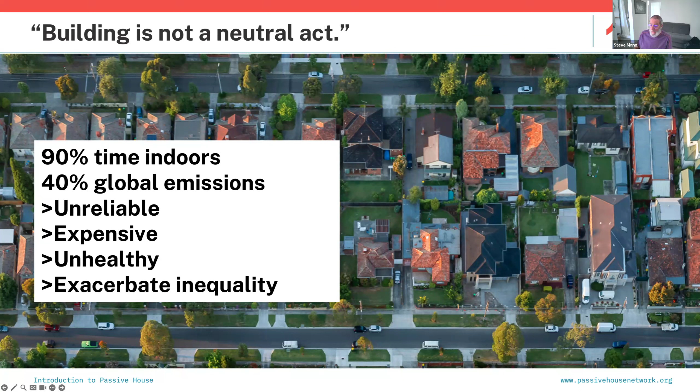So the people with the fewest resources generally get the short end of the stick. That's not a new idea or a new mission, it's just the way it is. In the passive house world, we have the opportunity to address that issue as well, and there are people doing that. I'll show you a few examples related to that, but we need more. We need a lot more.

In the world of climate change and everything that triggers, with fires, with floods, with extreme heat, like they had up in Portland a couple of years ago—I have a colleague that lives up there—with all of these types of things, we need to look out for the occupants. It all boils down to the occupants. We need to take care of the people.

There are basically, in the passive house world, two kinds of buildings that exist: those that are prepared for climate change as best as we can be prepared, and those that aren't. You can't possibly totally address climate change perfectly, that's just not going to happen, but you do the best you can to minimize your impact on climate change and to maximize the quality of life for the occupants.

That's what we're trying to achieve. So you either go down that path or you don't. And if you don't, then you're really not preparing yourself or the people that occupy the buildings you design and build for the future. We really need to be responsible about these kinds of things.

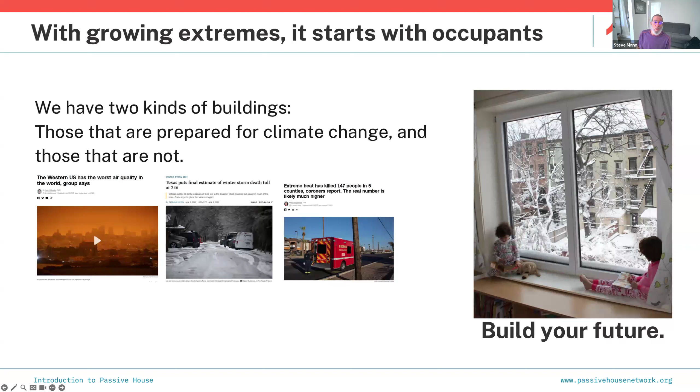So when we look at all these things from a passive house perspective, here's sort of a bullet list of things that we look for. It says here, efficiency underlies what we value most, but we don't start with efficiency—I'll talk about that a little bit more in a couple of slides. What we really focus on is comfort. That's probably the key number one issue, comfort for the occupants.

Zero emissions if possible—we want to minimize the carbon footprint of the buildings, both as they are built and as they're lived in. We want them to be as healthy as possible. We want them to be cost effective.

And there is a stereotype that passive house buildings cost more to build. For single family residences, yes, that's probably true. But for multifamily buildings, it's actually possible to build multifamily buildings that are passive house certified that cost no more, or perhaps even less, than a market rate multifamily building. So cost effective is a relative term, it kind of all depends. Other things we're looking for are resilience.

What that means is when we have climate related events, these buildings survive. Just to give you one example, if we have a power outage in the winter—and I know in California we have a mild climate zone, but it does get chilly in the Bay Area—if we have a power outage for a couple of days in a passive house, typically you won't see the temperatures drop significantly.

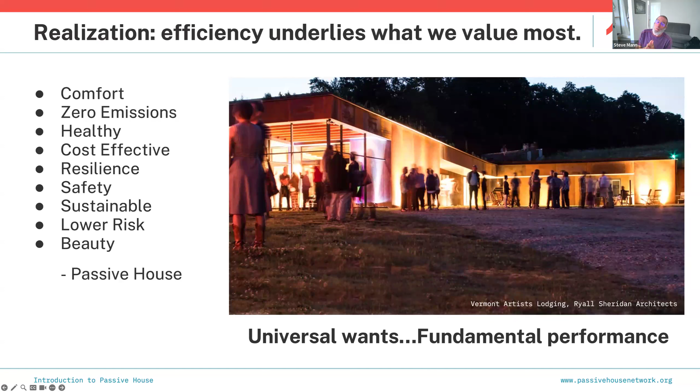Courtney asks: can ERV filters handle smoke season? I've heard they can—a separate filter box can be an option. The ERV filters can handle smoke season up to a point, but you can also add additional filtering in line with the ERV filter. I'll talk about ERVs for those who don't know what they are—you can filter the heck out of incoming air, put HEPA filters in line, put multiple filter boxes in line. There are different options for dealing with smoke events in a passive house, but generally they perform very well. Again, they don't perform perfectly, but they do better than most.

What we're looking at in the passive house is fundamentals. We don't look at aesthetics so much, we don't look at daylighting, although that's a factor. What we do look at first and foremost is the enclosure—we want to build a high quality enclosure that drives this whole process. If you focus on that using well-known building science and physics principles, and this is where it can get nerdy, all this other stuff I just talked about kind of falls out of that process naturally. It's not about mechanical systems.

That comes last, believe it or not. You don't solve a performance problem with hardware. You solve it with the building enclosure first and foremost. And if you take that approach, you pretty much empower everybody in the whole process to build a good building.

We think of this as a team sport, so people don't operate in a vacuum. Ideally, in a passive house project, for those of you who may have heard the term integrated design team, we try and do that, just like in other architectural or building projects. There's more of a focus on that in the passive house world. Doesn't always work perfectly, just like other types of projects.

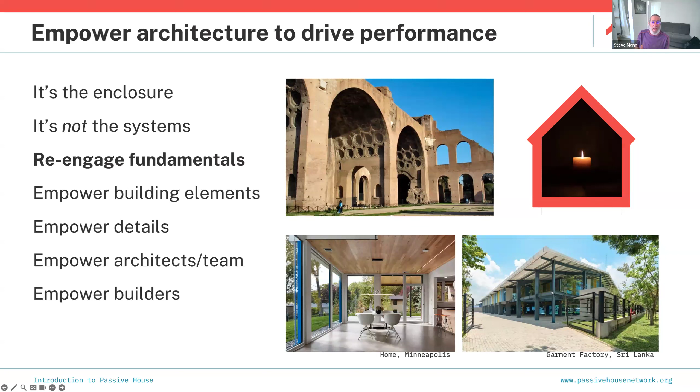But we try and get everybody involved at an early stage, before you even have a permit or construction documents. You want the architect, the general contractor, the mechanical engineer, the passive house consultant or designer, the builder, maybe some key builder people, everybody. You want to get them in a room together and talk about what you're trying to achieve. If you do that and treat it as a team sport at every step of the way, it can be very successful. This approach lets everybody participate, engage, and make the process work.

One side effect of this is part of the passive house commercial. On the left we show a typical net zero single family home in a colder climate, like much of California north of San Luis Obispo - considered sort of a heating-dominated climate, not massive heating like you'd find up in Truckee, but there is a heating requirement in the wintertime.

Unfortunately, if we try to offset a heating requirement with electricity production from a PV or solar array, we have an imbalance - less sun in the wintertime, but a higher need for heat. So you get this imbalance during the heating season, the beginning and end of the year. To compensate, we put more solar PV on the roof than we really need, in hopes that it balances out your net zero requirements, so that at the end of a 12-month period, your cost of utilities is about the same as the rebates you get from your utility for solar production. Kind of, sort of - it doesn't really work that way perfectly, but that's the intent.

But if you look at the right, on a passive house, by empowering the building team to focus on the enclosure, you significantly reduce the heating requirement, and as a side effect, also the cooling requirement - not shown in this graph, but it comes out of this as well. So your heating and cooling requirements get crushed significantly. Typical numbers we see are 70 to 90% lower than a code-built, in this case, net zero single family home.

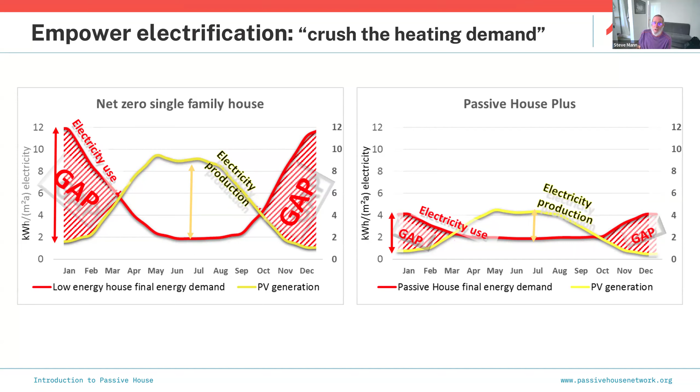Here's another thing that comes out of this: depending on how you design and build your house, we can lower the embodied carbon. This graph uses a tool called PHribbon, which I'll talk about more towards the end when I discuss tools. What we can do is analyze the embodied carbon that goes into the construction of the house, and also analyze the operational carbon created by the operation of the house - carbon that goes into the atmosphere from heating, cooling, electricity consumption, things of this sort.

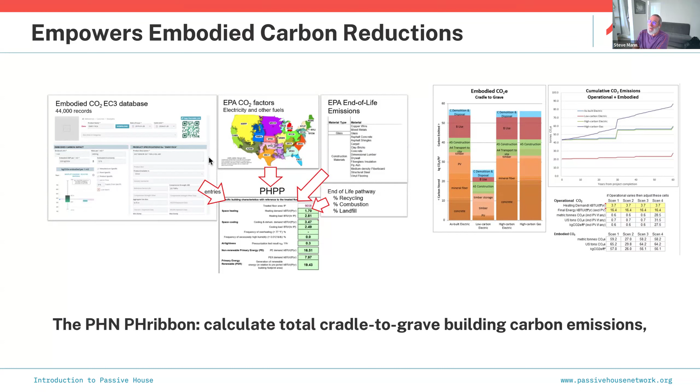So if you want to get nerdy, you can drill down into all of these things to see just how big an impact a building you're thinking of building, or that you've already built and are operating, has on embodied carbon, which directly impacts climate change. There's a lot of different aspects to it - this is why I say it can be a deep topic depending on how deeply you want to dive. Passive House does work well, it plays nicely with many other things.

So Passive House, because it's extremely energy efficient and promotes extremely high quality indoor environments, works well with all of these things. It's complementary. These are not conflicting types of standards—they all work well together. The point of all of these, at the end of the day, is to build a high quality, high performing building that works great for the occupants.

Okay, I don't see any questions. So let's talk about the logic here. This kind of came out of a lot of different things.

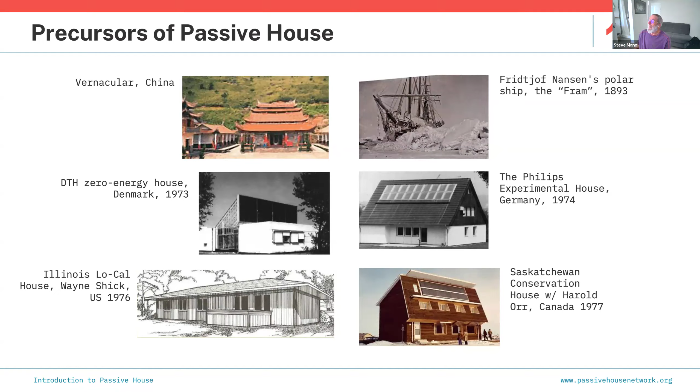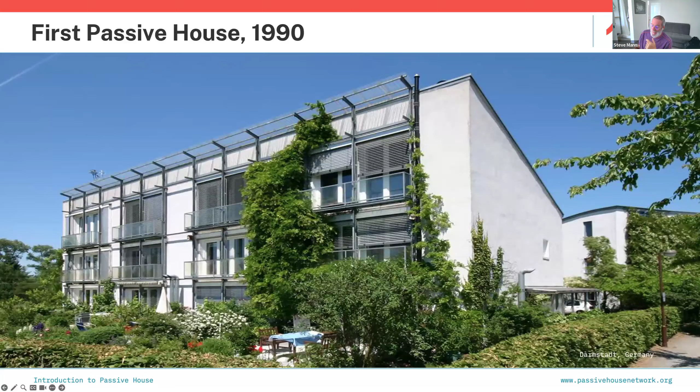But the way this came about was he said: I'm working as a physicist. I read that the construction industry has experimented with adding insulation to new buildings and that energy consumption had failed to reduce. This offended me—it was counter to the basic laws of physics. I knew that they must be doing something wrong. So I made it my mission to find out what, and to establish what was needed to do it right. That's how it started.

And what he did was he dug into the fundamentals and started looking at international standards for building performance, for measuring performance, for ventilating buildings, and all of these things, and incorporated them into what turned out to be the passive house methodology, as defined by the Passive House Institute in Darmstadt, Germany. Basically, he went back to basics.

Much like Samin Nosrat went back to basics in her New York Times bestseller, Salt, Fat, Acid, Heat. She basically said, if you want to cook good food, you have to focus on these four basic elements and how they interact with each other. And he kind of took the same approach, without the yummy food involved.

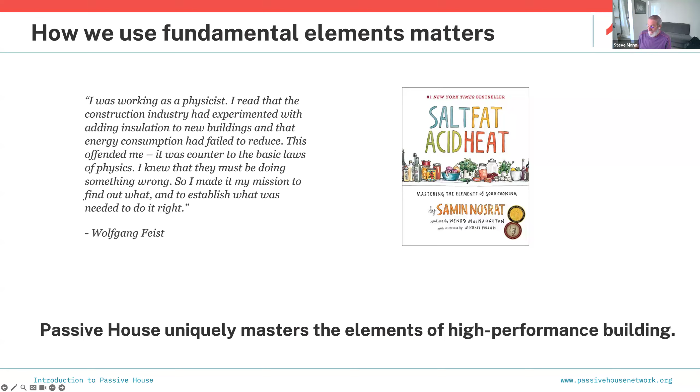And then this is sort of the basic definition that came out of this. A passive house is a building for which thermal comfort, as defined by ISO 7730, one of the international standards, can be achieved solely by post-heating or post-cooling of the fresh air mass, which is required to achieve sufficient indoor air quality, without the need for additional recirculation of air.

Now let me rephrase that. Notice he says you have to bring in fresh air that's required to achieve sufficient indoor air quality. So there's constant ventilation going on. And because it's fresh, that's where air filtering comes into play. If you don't filter the air, it may or may not be fresh depending on where you're living.

So he's saying, we do that first, but then the building itself has to be built to such a degree that just by heating or cooling that fresh air coming into the building, you should be able to maintain interior comfort for the occupants. It says nothing about the building enclosure here, but that's the massive implication. The only way this statement works is if you build a good enclosure and then ventilate it. If you do the right kind of enclosure, you should be able to heat or cool it with virtually no extra energy.

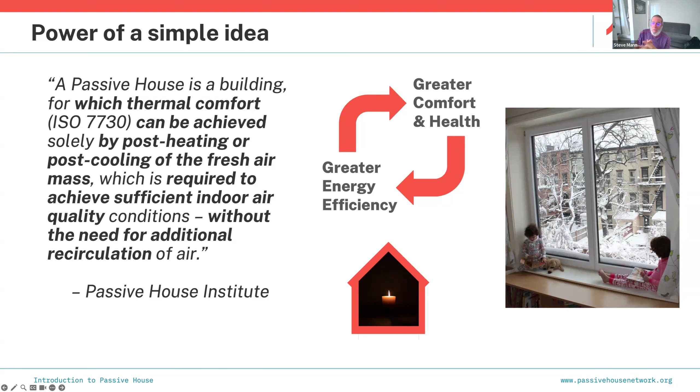So these are all the things that come into play here. You've got an enclosure, and I'm going to talk about the principle of the enclosure. You've got the ventilation, I've touched on that, but I'll talk more. You've got the occupants, and in the passive house world, we focus on the occupants. We have criteria that say it's not just about air quality or temperature, it's also about places where there could be cold spots or hot spots in the building. That takes into account all the activities that take place in the building.

So that gets factored in. There's specific criteria that says if somebody sits next to a window, that window temperature can't be below approximately 65 degrees, or they're going to be uncomfortable. Or say 75 degrees in the summertime, they're going to be uncomfortable. And then all this comes into play, and you look at the energy balance, and this is calculated.

So we look at lots of stuff in much more detail than we look at things in, say, the Title 24 world. Title 24 kind of skims the surface. For those of you in the mechanical world, ACCA, which does load calculations, kind of skims the surface. ASHRAE building calculations kind of skim the surface. The only system I've ever seen that really drills down to the level of detail that lets you guarantee performance of a building is the passive house criteria. So sorry, it's a little bit of a commercial here, but it's true. I do this, I experience this, and my clients do as well.

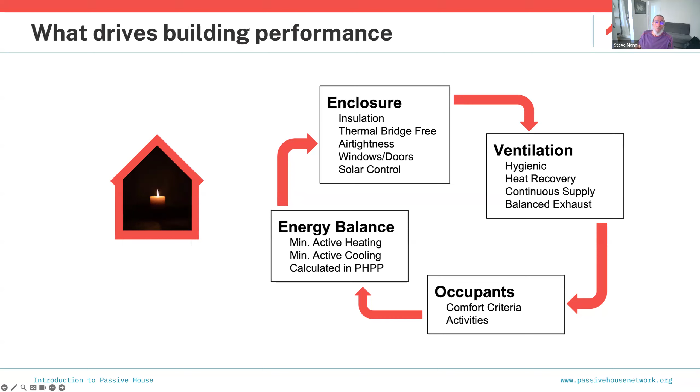So the underlying way we approach this is we don't look at how to improve something from a baseline. In the passive house world, we say, in order for this building to perform, it can consume no more than this much energy for heating and cooling, period. It's the same number for all buildings around the world, and it's a low number. So you build a building that's going to use as little energy as possible. And from that, all of this other stuff falls out of it, all of the comfort criteria and all of the air quality, and all of those things.

What are the units? Good question, Jenna. I think you want to nerd out. It's in IP units, 4.75 kBTU per square foot per year for both heating and cooling demand. And for heating and cooling loads, it's 3.17 BTU per hour per square foot. I'm not going to talk about those in this presentation, it's a little deeper than we want to go. When this is over, I can send Sarah a chart that shows this stuff, and she can distribute it to all of you, hopefully that's okay with you, Sarah. It's a very small set of numbers that's very specific. I'd be happy to share.

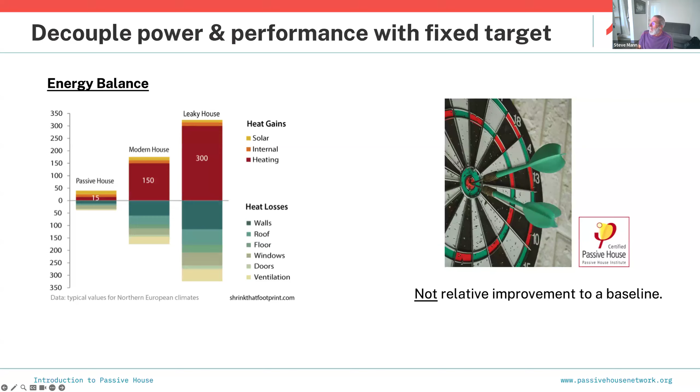Okay, so that's kind of how we got there. Now we're going to talk about the methodology. There are 5 basic elements. There are a lot of details and nuances I'm not going to talk about, but there are 5 basic things we look at. This is to build a good enclosure and then to create the air quality you want in the enclosure. These are not in any particular order, but this is just kind of how we always talk about them.

First one is insulation. We want the right amount of insulation for the climate zone that gets you the performance you're looking for, and that's where you shrink the heating and cooling requirements to the point where you want them.

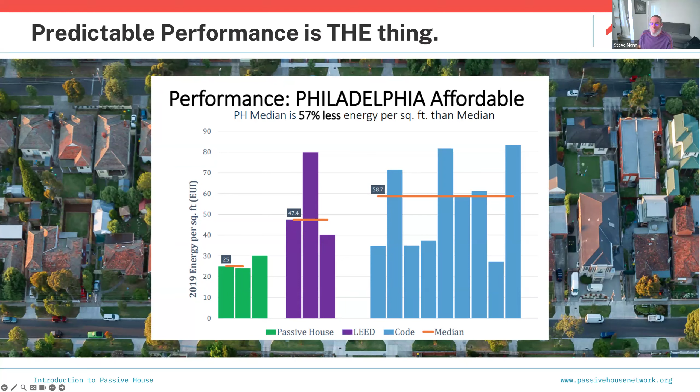Oh, from the last EUI slide - oh, I have no idea. Units here, that's per square foot, but I don't know if that's watts or BTUs or kBTUs. In this case, we're looking at about 25 somethings per square foot. I would say that's probably kilowatts, but I don't know, I couldn't say for sure, I'd have to see a little more detail on that. Sorry, that's not a very good answer. The numerator - kilowatts is power, not energy. Yes, you're right, thank you for pointing that out. Kilowatt hours, perhaps. I don't really worry about the scale on the units here, and I'm sorry I'm not answering that question satisfactorily. I'm pretty sure that's what you're thinking, not that I'm reading your mind. Alright, almost had me going down a rabbit hole there.

Okay, right amount of insulation, first thing.

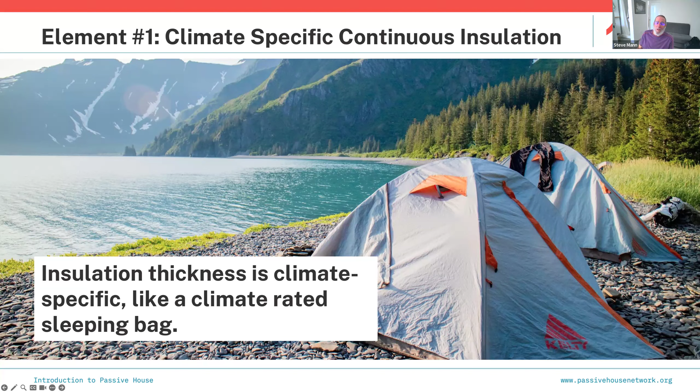Second thing is thermal bridge free. A thermal bridge is someplace in a building where energy can move in or out. How you define that depends on the season - in summertime it's heat energy maybe coming from outside to inside, in wintertime it's heat energy moving from inside to outside, depends on the climate. But this happens anyplace where, remember, we had continuous insulation - ideally we want to wrap the whole building in insulation, but you can't do that, it's not practical. So you're going to have junction places where planes meet each other, horizontals meet verticals, windows meet walls, roofs meet walls, and so forth. There are lots of places where thermal bridges can occur. What we do when analyzing a passive house design is look at all of these places to determine if they're going to be a problem or not. We actually do a thermal analysis, a finite element analysis of those kinds of places, and determine whether there is a thermal bridge.

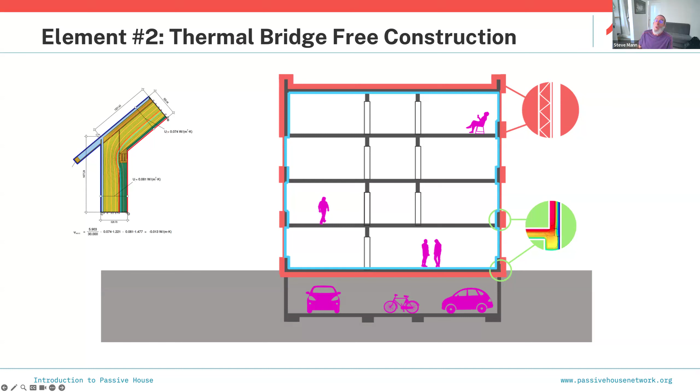If there is a thermal bridge, how bad is it? Or in some cases, how good is it? And what are we going to do about it? Do we need to worry about it or not? We do this for all the locations highlighted in this slide, all the intersections. Ideally, what we try to do is design all this stuff so that just by looking at it, you can say, oh, there's no thermal bridge there, we know that because it's sufficiently insulated, and we just go on. So however we approach it, we want to minimize or eliminate thermal bridges.

Now, the reason we look at thermal bridges, one is it has to do with energy movement, unwanted energy movement, but also if you have a thermal bridge at a window, for instance, a poor quality window with a thermal bridge is a poor quality window by definition. It can cause mold, mildew, and condensation. And this goes back to comfort, both temperature comfort and air quality. You do not want mold and mildew in a building. We actually have criteria, numerical criteria, to say, is this window going to be mold and mildew free and condensation free?

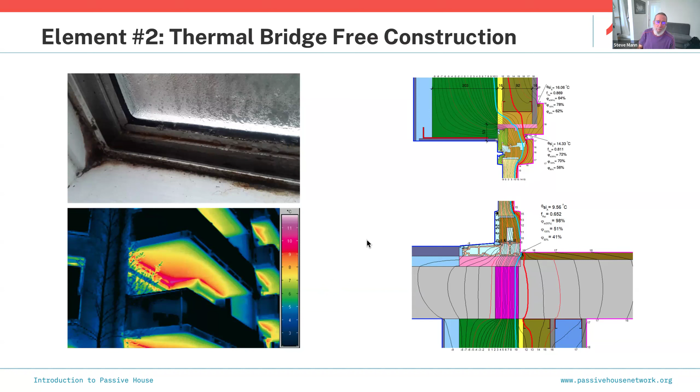Number 3, here is the air and smoke tight enclosure. Really tight. When I talk to my clients, especially first-time general contractors, I say conceptually, in order to do this successfully, you have to think of it as you're building a balloon. It's got to be airtight, like a balloon is airtight, and then you're going to insulate it. So you're actually building an insulated balloon. And if you can do that successfully, you essentially have a passive house. It's more complicated than that, but that's a simple statement of what you're trying to achieve.

And airtight is the thing that scares general contractors the most. It makes them the most uneasy if they've never done this, and even if they have done it, because it involves lots of attention to details. But if you look at this, the benefits are huge. It reduces drafts, which has to do with comfort. It reduces moisture damage, which has to do with mold and mildew and indirectly comfort. It reduces heat loss, which has to do with energy efficiency. It gives you a way to control indoor humidity, or at least helps you control it. So again, comfort, air quality, things like that.

It keeps out pollution. It lets you control the interior air. Now, it doesn't directly let you control the interior air, but because it's a balloon, it gives you an environment whereby you can control the interior air—for instance, the amount of fresh air, the humidity levels, things of that sort. So it creates an environment that you can manage what's going on inside the building. Out of all these five principles, this is the superpower. When I used to talk to people about renovating existing buildings, whole house upgrades, which still goes on, and that was the thing I was involved in fifteen years ago, I would say, if you're going to do nothing else, make your house as airtight as possible.

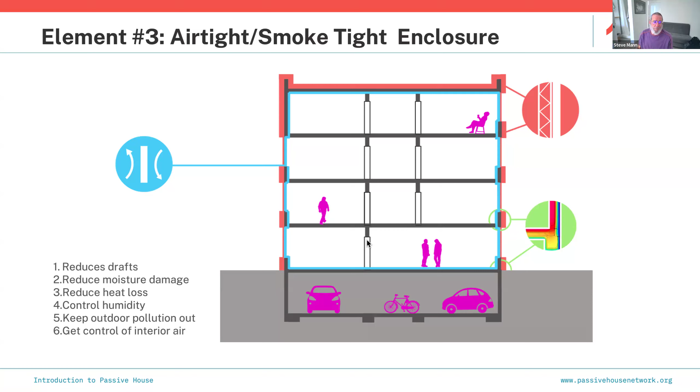And then here, this is sort of like my insulated balloon. You get an airtight enclosure. It's like a windbreaker over a fleece sweater, or it could be a windbreaker under a fleece sweater. It doesn't matter. You can put the airtight layer anywhere that works. It can be inside, it can be outside, it can be in the middle of a wall, it can be in the basement, it can be all of those things. But you combine that with a sweater, and you've got a passive house enclosure for the most part.

Finally, we get to high performance windows with solar protection. High performance windows does not mean triple pane windows. It might mean triple pane windows. It's a lot easier to achieve really high quality indoor comfort if you have triple pane windows, but it's silly to pay for triple pane windows if you can achieve the same goals with double pane windows. So there's no point in overspending just because you can. We look for the best quality windows that are going to deliver the performance you need for the climate zone you're in.

Now, the solar protection doesn't mean low solar heat gain coefficient windows. For those in the certified energy analyst world, you're familiar with that term. Some designers are. Solar heat gain coefficient is the amount of solar radiation a piece of glass will let into the building. So we try to tune the glazing so we get the right amount of solar radiation to the building so the heating requirement is as low as possible. But we also don't want so much solar radiation coming in that the cooling requirement goes up, so we want that as low as possible too. So the solar protection might be the glazing specifications, but it might also be shading on the outside of the building, things like awnings or blinds. Just like you want the right amount of insulation, you want the right amount of solar radiation to achieve your result.

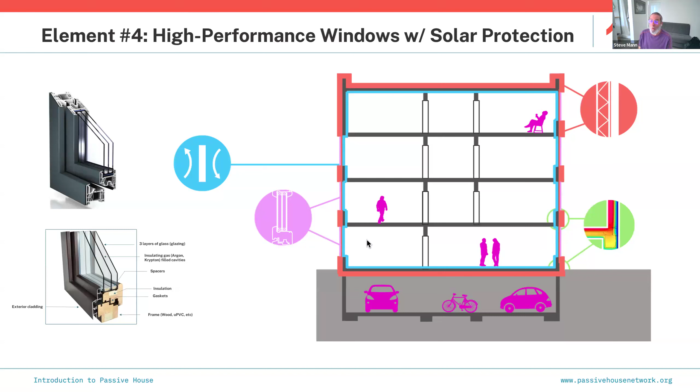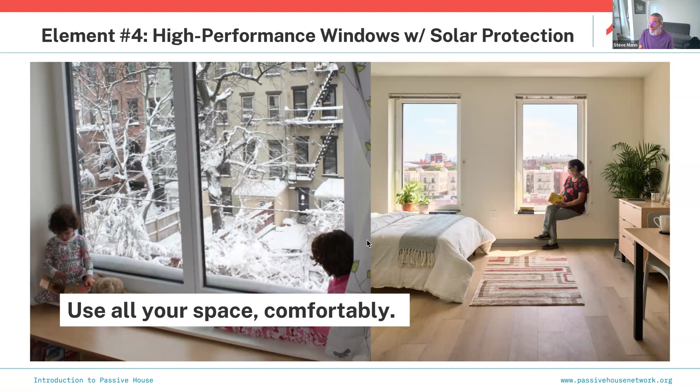Back to windows. If you have high performance windows with the proper solar protection, this is what you get: you can sit right next to the windows in the dead of winter and be comfortable. This shows a couple of circumstances there. Here's the effect we're looking for: with the right windows for the climate zone, you're looking for a temperature difference between the window surface and the inside air of no more than about 5 degrees. There are different international standards for this, and the passive house standard is more stringent than these other international standards. What this does is it means somebody inside the building is not going to feel uncomfortable. That's what it's all about. And as a side effect, you also get no condensation, no mold, no mildew, none of that stuff.

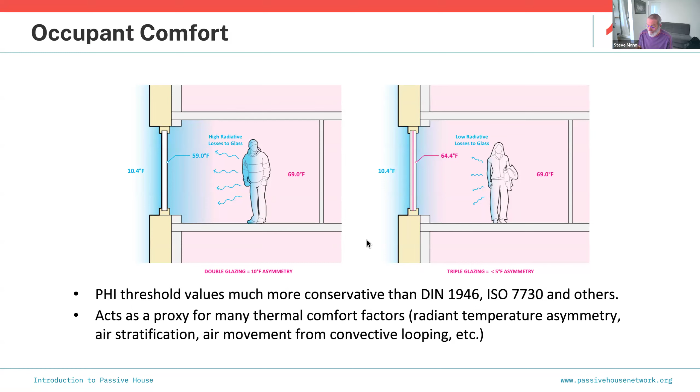We look at trees in the summertime and wintertime as two separate conditions if they're deciduous. We look at adjacent buildings. We look at mountain ranges that are two miles off in the distance. We look at all of this when we analyze the shading of a building. It's very accurate if done correctly, and it gives you a very clear idea of what you need to do to tune your glazing.

That might mean the specifications, the sizes of the windows, the locations of the windows, or things attached to the building that you have control over during the building process, and so on. It's very detailed, and it works. I can just say that.

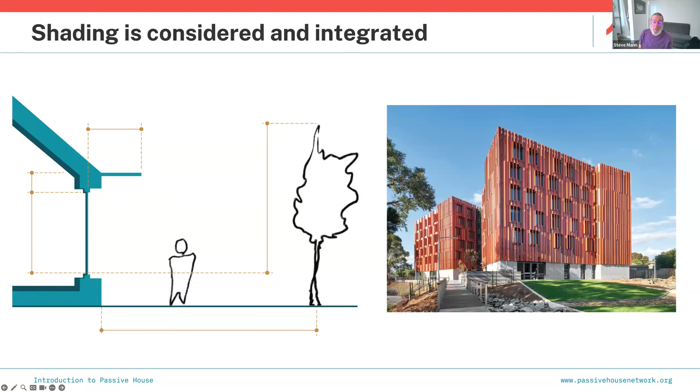So that's number 4. Number 5 is the ventilation. This gets back to someone mentioning a heat exchanger - I believe that was Vito. Yes, so first of all, we have the ventilation.

I don't need to explain that - we bring fresh air in from the outside. It's filtered, as much as you want to filter, whether reasonably well or super filtered, depending on what the occupants want. For every cubic foot of fresh air we bring in, we exhaust the same amount of air going out, so it's a balanced system. You have no pressure differentials between inside and out. And it's filtered. The other thing we do is heat recovery.

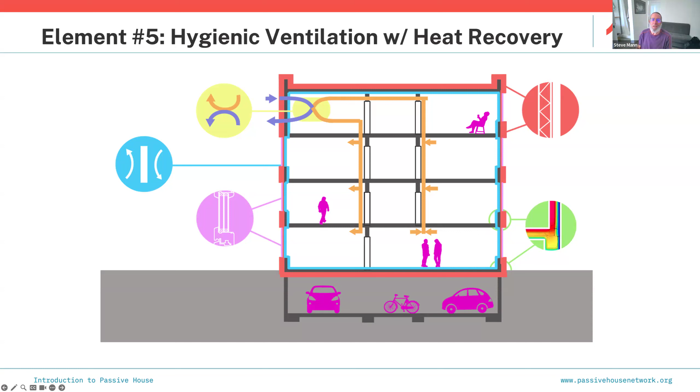Let me get to that. Well first, I'll go to the obvious benefit: you get good air quality because of the filtering. That's one effect. But the other thing you get is the heat exchange - that's HRV, heat energy recovery, or heat recovery ventilator.

It's going to be, say, 65 or 66. It won't be 70 because this isn't a perfect thing, but it picks up an awful lot of the outgoing heat and injects it into the incoming air. The net result is that the amount of energy required to get that incoming air back up to 70 for your indoor comfort is very, very little. This is how, by doing this ventilation with heat recovery, you can minimize the heating requirements of the building from mechanical equipment. The same thing happens on the cooling side.

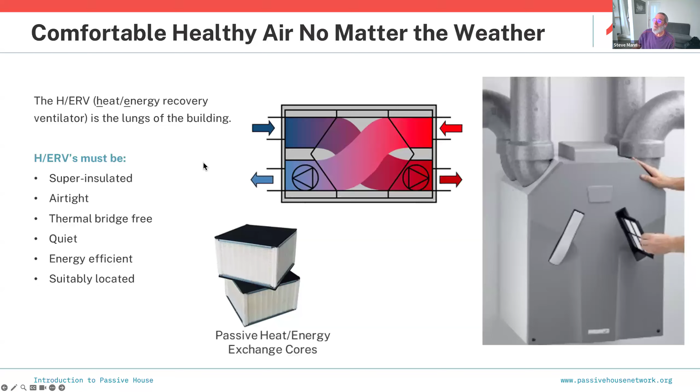In multifamily buildings, you can do centralized or decentralized systems. Everybody gets their own little HRV or ERV, or in larger buildings you can get big units that go up on the roof or in a mechanical room that can serve 8 or 10 or 20 stories, depending on the design. These come in different flavors. I'm primarily talking about residential buildings because it's easiest to grasp in the context we're working with here.

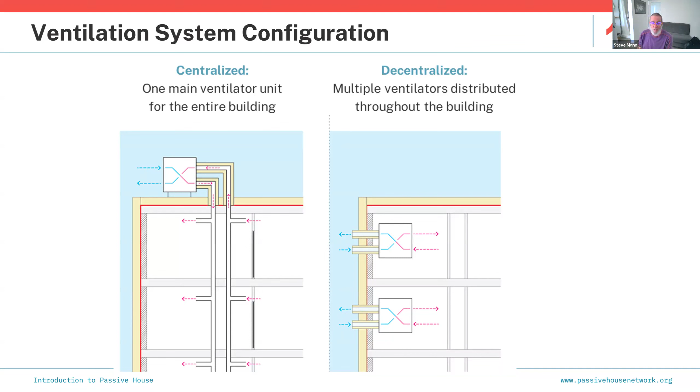So to review: climate-specific insulation, thermal bridge-free connections, air tightness (that's a superpower), high-performance windows and doors with solar protection that's properly defined and figured out, and then hygienic ventilation with high efficiency heat recovery. Those are the 5 principles that we look at.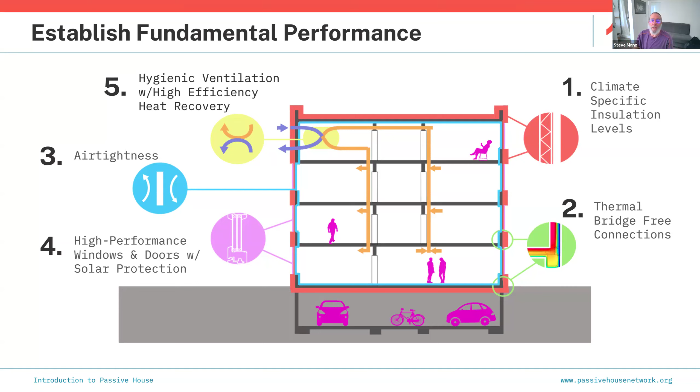Once we do all of that, then we look at the mechanical equipment and we can reduce it significantly. Like I said, my heating load is 1,300 watts. I don't really need a heating system except that code and Title 24 says I need one, so I have one — it just doesn't run very much or often. Same thing with cooling: I don't have to have a cooling system, but my house stays between 71 and 75 throughout the year.

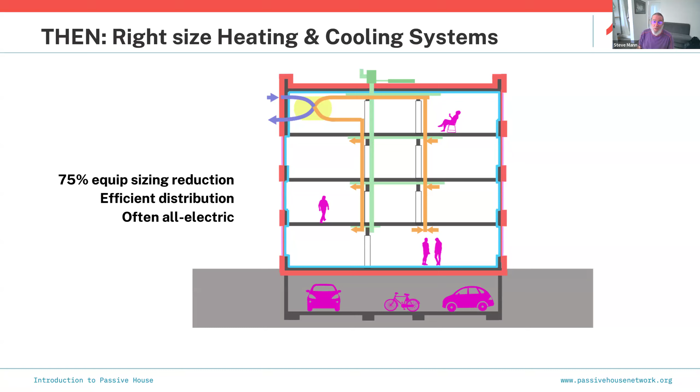And it all works. So if you follow the 5 principles, the equipment can be much, much, much smaller — almost to the point where it's possible to have a passive house that does not require a mechanical system, except the code says you have to have something. And once you do that, if you have the right kind of enclosure, with some smart controls and renewables, you get all the benefits I described many slides ago: comfort, energy efficiency, low carbon footprint, et cetera. You don't fix the problem with hardware — you fix the problem by designing the right kind of building.

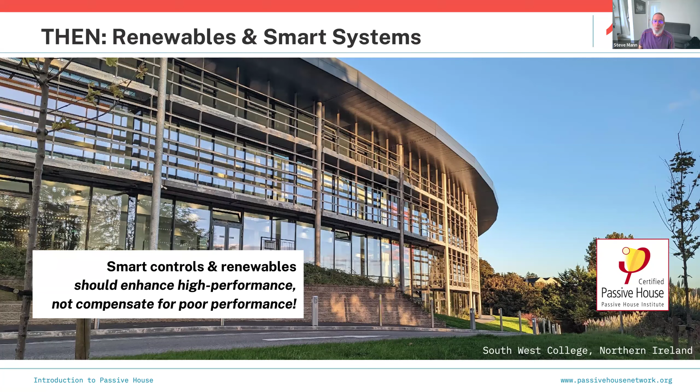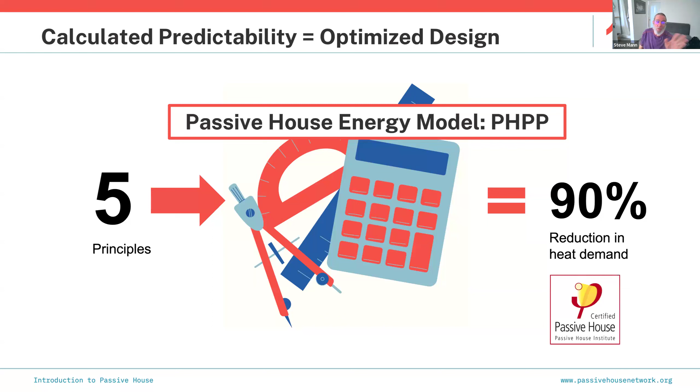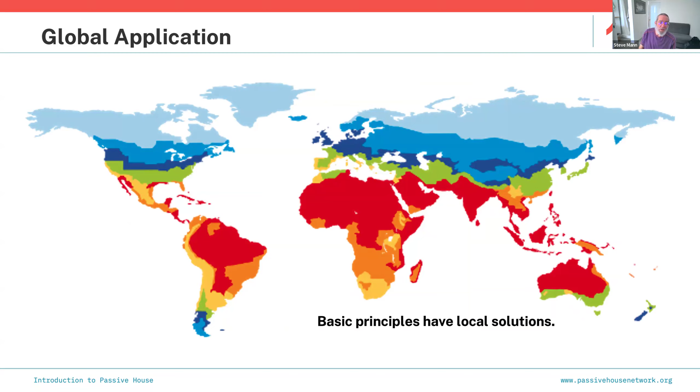And if you do this according to the threshold that I believe Jenna asked about, which I'll provide to Sarah, you can get a 90% reduction — that's best case. In extreme cases, you can get 100% reduction in heating demand, for new construction or retrofits either way. We do all of this with a tool called the Passive House Planning Package, which I'll talk about a bit. It works everywhere in the world — there are passive house buildings, small ones and big ones, in all parts of the globe, except for the extremes, to the best of my knowledge.

Okay, so how do we actually do this? You now have a basic understanding of the design strategies and the principles.

First of all, we do this with a certified professional. This might feel a little bit like a marketing pitch for 'go out and get certified passive house training, it's good for you.' Well, yes and no. I don't mean it to be that. I just wanted to give you an idea.

In order for this process to work, there has to be somebody involved in the design process that is a certified passive house designer or consultant. It requires enough study that if you're going to learn about this stuff to the level you need, you might as well take the exam and get certified.

It's that simple. And when it comes time to build the building, it'd be good to have some certified passive house tradespeople in place as well, because they're going to understand what you're trying to achieve. It makes it much easier to not have to explain to them the airtightness principles and how to seal up the building, because they've already been introduced to it.

It is possible to build a passive house with a general contractor and trades that have never done this before and don't know anything about it. In fact, that's how we did my house, because I couldn't find a builder in the Bay Area that was available or interested or knew about this stuff 5 years ago. That's changing, fortunately. So it's good to get the training.

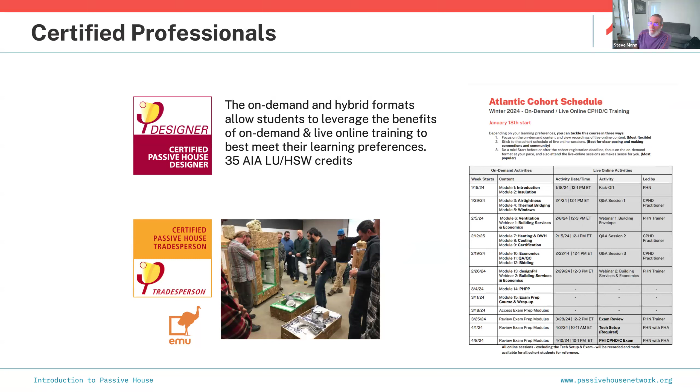Okay, so we have certified professionals, a couple different kinds. There are actually more than that, but these are the two big categories. Okay, there are certified components.

The Passive House Institute in Germany has a whole process whereby they can certify components. So you can get certified doors, certified windows, certified panelization systems, certified ventilation systems. The two ventilation systems I mentioned, Brink and Zehnder, are certified by the Passive House Institute, and it's a rigorous certification. The requirements are pretty stiff.

And there are other certified systems for larger buildings that are not Zehnder or Brink. Those are the two residential systems that I come across all the time. We come across certified windows in almost every project because it's just easier to certify the building if you've got certified windows. There are other things as well.

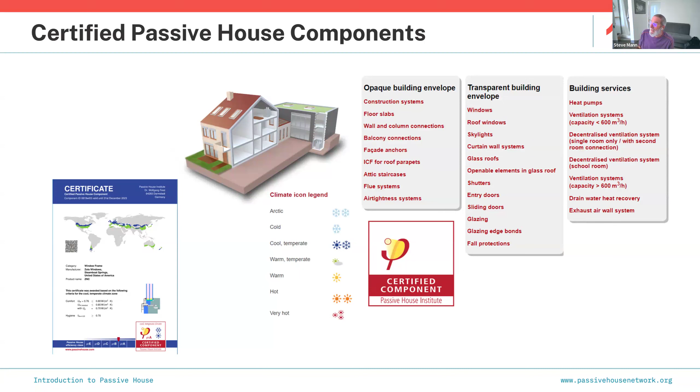Here's the list of different categories. In North America, I'd say I mostly see glazing systems, window systems, doors, and ventilation systems, and skylights - I'm starting to see those too. So, but lots of other things if you choose to go down that path.

And then there's the building certification. There are 3 levels of certification, depending on the overall performance of the building, primarily in terms of how much solar energy it generates and feeds back into the grid. Okay, so the more solar energy, I'm simplifying, the more solar energy you feed back into the grid, the higher level you get. It's sort of like LEED: silver, gold, platinum, okay, that kind of thing.

Although the LEED tiers are defined differently, not just in terms of solar PV, it's sort of like the better you do, the bigger reward you get, kind of thing. But a Passive House Classic - everything I've been talking about so far - Passive House Classic is the basic target. And this Passive House Premium is tough to do, very tough, but it can be done. There are some buildings that have done it.

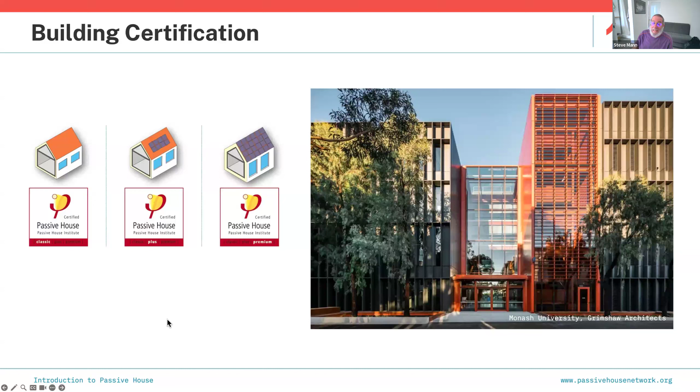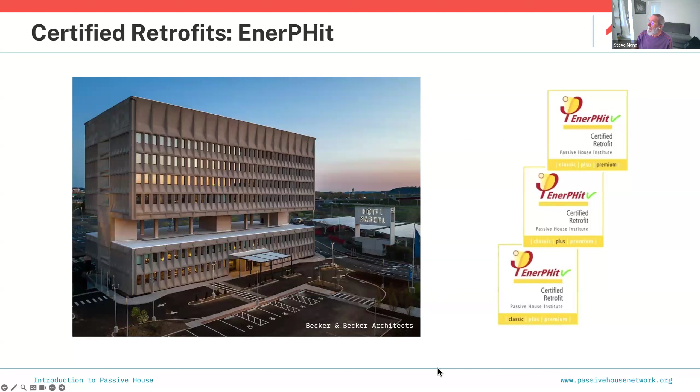This also applies to retrofits. There are 3 retrofit tiers. Okay, and again, it's Classic, Plus, and Premium. Again, it has to do with how much energy you push back to the grid.

There are 2 retrofit methods. One is performance, and that's kind of like in the CABEC world, in the certified energy analyst world, you have prescriptive method and performance method. Performance method, you have some thresholds you have to meet, and you crunch the numbers. You hit the calculate button based on the building characteristics, and if you hit the thresholds, you can certify that building using the performance method.

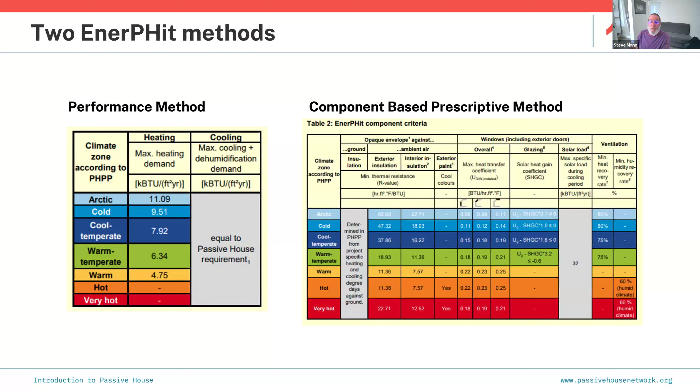You can also certify using the component-based prescriptive method. In order for that to work, you've got to use certified components for those major components of the building that you're replacing. Remember, this is just for retrofits, not new construction. So we have these 2 options. Most people I know do the performance method for retrofits, but just kind of like in the Title 24 world, that's true as well, in my experience anyway.

Okay, here's the tool we use, the Passive House Planning Package. It comes in metric and imperial versions. It comes in German, French, Spanish, English, Dutch, I think, maybe. Okay, that's the calculation engine. That's what you use in order to determine if a building design will meet the Passive House criteria.

In addition to that, there is a plugin called Design PH, which I insist that all of my projects use. It's a SketchUp plugin that you basically build a 3D model in, and you take and import the results of that model into the Passive House Planning Package. If you don't use Design PH, just doing the area takeoff and the shading analysis and other things in PHPP alone can be very laborious, depending on the complexity of the building.

And I just won't do that anymore. I used to do that. Back in the old days, they didn't have SketchUp and Design PH, and that's how they did these things. But fortunately, technology has evolved a bit.

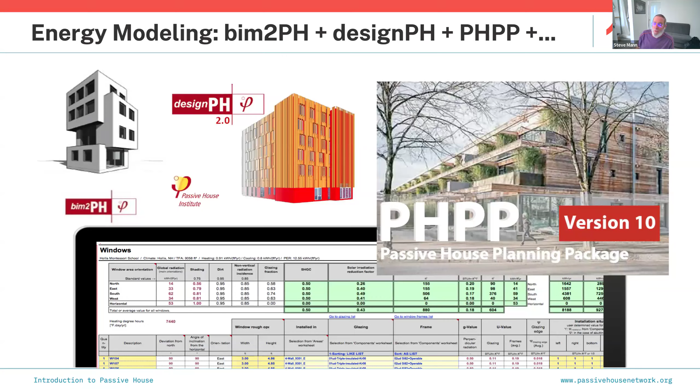You put it in a door, you blow air into the building, and you see how much it leaks. Again, that's a gross simplification. You blow air into the building to see how much it leaks, and then you turn around and suck air out of the building and see how much it leaks.

Question from David: how does PHPP compare to other modeling packages such as Energy Plus? Depends on what you're comparing. In the Passive House world, we like to think that the PHPP is the most informative and the most accurate. What it doesn't do is room by room or zone by zone analysis. It's a whole building analysis. So that's its weak spot.

In larger buildings, if you need zone analysis, oftentimes there are ways to take the PHPP and export it into something like Energy Plus if you need to do zone analysis. The people I know that do that have said, yes, we can do that, and that works. However, Energy Plus does not do well in doing the kind of mechanical analysis that we need for passive house analysis. It falls short in that respect, especially in, say, something like ventilation. So pluses and minuses. Energy Plus is great for certain kinds of things, but the passive house planning package is our required tool, and it works great in many, many circumstances.

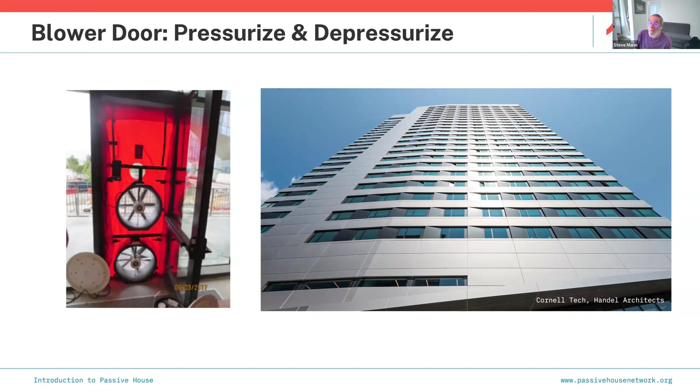I've seen people use third-party tools for indoor lighting analysis, let's say daylighting. Passive house PHPP does not do daylight analysis. It has nothing to do with that. That's an aesthetic consideration that's important, and it is related to solar radiation, but it doesn't inform you about that to any degree that some people might want. I'm not saying it's perfect, but for what we're trying to accomplish and the strategic objectives here, it's what you need to use and it does the job. Absolutely.

Okay. Roadmap to building certification.

If you're going to do a passive house, you should get it certified. Easy for me to say because that's part of what I do for a living. I would say, though, in half of the projects I do, I get hired as a consultant to help the architect or the developer or the project team design a passive house, but they're not going to certify. And I'm fine with that. If they want to build a high performing building that's going to achieve all the objectives, that's okay. Because the extra certification step is an extra step and it can be a pain because there's more things you have to do at the end, and it can make everybody a little bit annoyed. It depends on the complexity of the building and whether you were planning for certification in the beginning or whether you treated it as an afterthought at the end.

But the only way you know for sure that the building is going to perform is to get it certified, because there is a commissioning process. Anybody who does a passive house inspired building is going to do the commissioning process because that's kind of one of their goals to begin with. And if you don't do the commissioning, you're crazy. You have no idea how the building is going to perform without it. And the commissioning is easy. It's a blower door test and it's a ventilation balancing system or commissioning. That's it. So it's not huge.

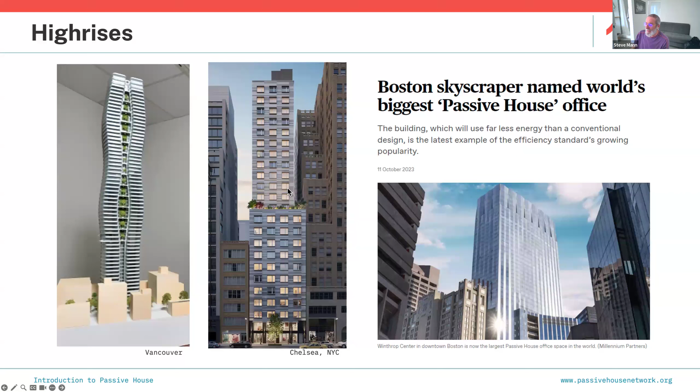Here's Vancouver and New York and Boston. And Chelsea in New York, that's built. Vancouver and Boston are in process.

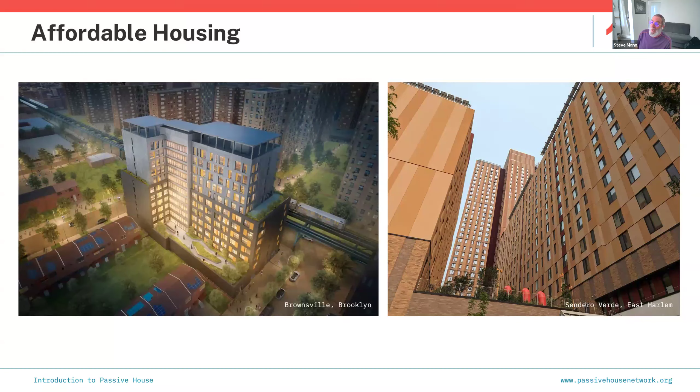So this may sound complicated and difficult, but they can do it for no additional money or for less money. So why wouldn't you do this? There's absolutely no reason not to do this for any kind of building, really.

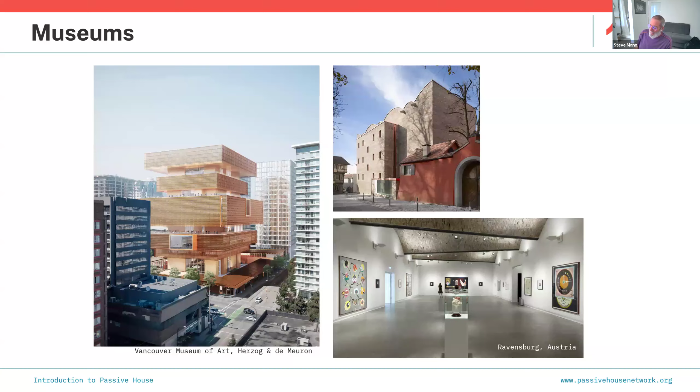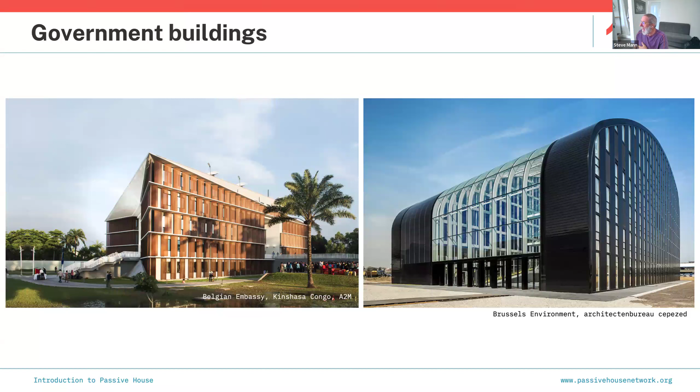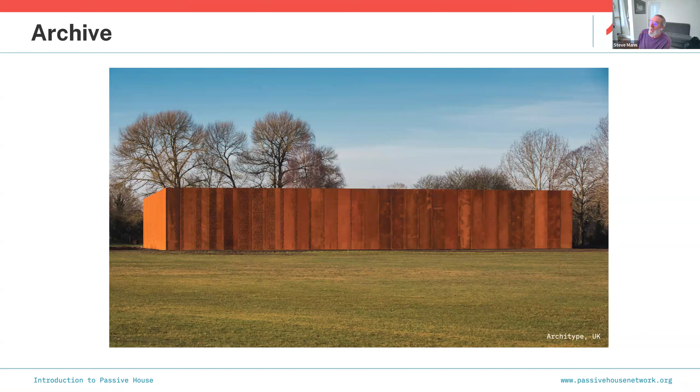An archive. Every time I see this, I look and say, what the heck is that thing? There are no windows. How can they satisfy the heating load with no solar radiation? Because that's the world I come from. But it's a certified archive of some type in the UK, and they do something there. Last time I looked at this slide, I got a closer look, and it looks like there's writing on the exterior walls. I'm not sure what that's all about. I'd like to know more about this building. It's mysterious.

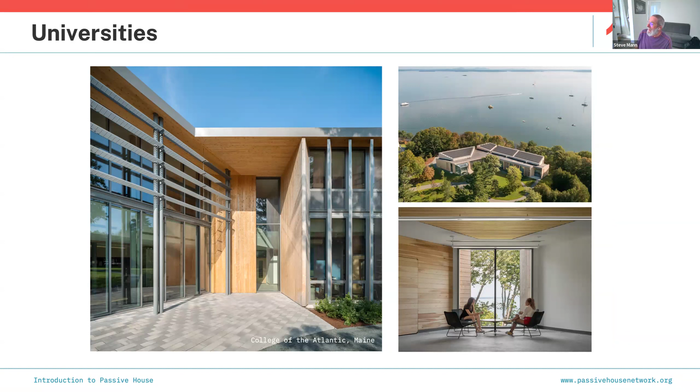Universities, these are a real thing. This is all in Maine. Great looking building, a great site. I wish I'd gone to school there. More universities, these are all real. This is in the UK, both of these.

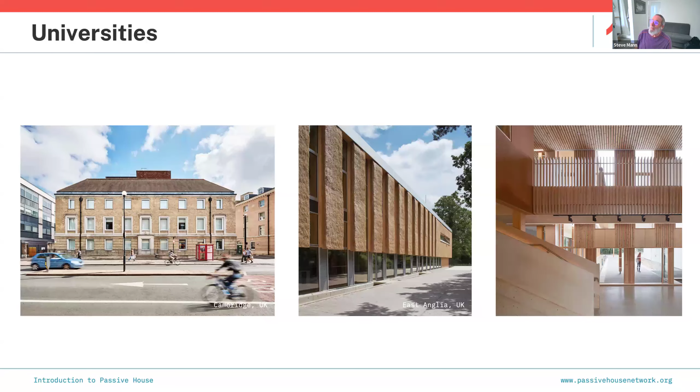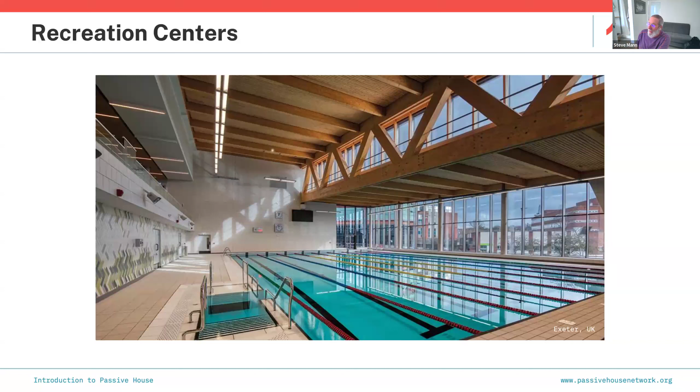A rec center with a swimming pool. Now think of the humidity load there, having to deal with that. So one passive house nuance is the interior humidity cannot dip below 30% at any time during the year. And in a case like this, the humidity also cannot exceed a certain threshold depending on the climate zone. How do you control humidity in something like this so that the indoor humidity is always manageable and comfortable for everybody all the time? To me, that's a real engineering feat. I think that's fabulous.

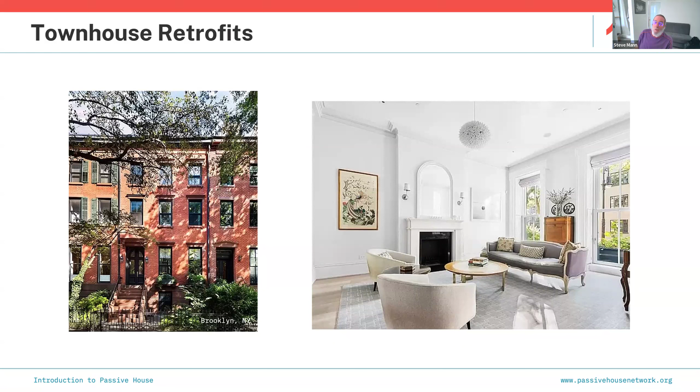Townhouse retrofit. There's a lot of these in New York, lots and lots of townhouses getting retrofit. Same thing is true in Boston and the Northeast. There's more of this going on in the Northeast than out here so far. That's because they have a lot of older buildings that probably are worthy of a retrofit. We've got a lot of younger stick-framed buildings that maybe deserve to be knocked down and rebuilt. But retrofitting is more of a challenge, and the value of the real estate is not considered quite as important. And then homes.

Here's a couple of traditional-like buildings, and then again, more modernist stuff. You can build any kind of building this way.

And I think I've run over a little bit, so good thing we're at the end here. So here's the commercial: well, build your future. If you're in the building industry, you're crazy if you don't dig into this and build stuff doing it this way. It's the only way to build.

When I first drank the Kool-Aid, 15 years ago, that was my thought. I was like, my God, why would I do anything else? And that's when I started giving up doing LEED and Title 24 and green building and all that other stuff, because it all paled by comparison. And I still feel that way.

So if this at all seems interesting to you, get trained and dig in and do it. When people come to me and say they're thinking about building kind of sort of maybe a passive house inspired thing, I always say no, just design it and build it and certify it. Don't beat around the bush, just do it and stop fooling around. And some of them take me up on that and some don't.

So I don't see any more questions. I'm sorry to run it over, but I'm going to pass it back to Sarah. Yeah, and actually our class today is a 2-hour class, so we have until 11:30. Oh my God, I was told an hour and a half. So, okay, well, yeah, no, questions, go wild. Okay, yeah, so I'll just run through my closing slides and then we can just open up for any questions.